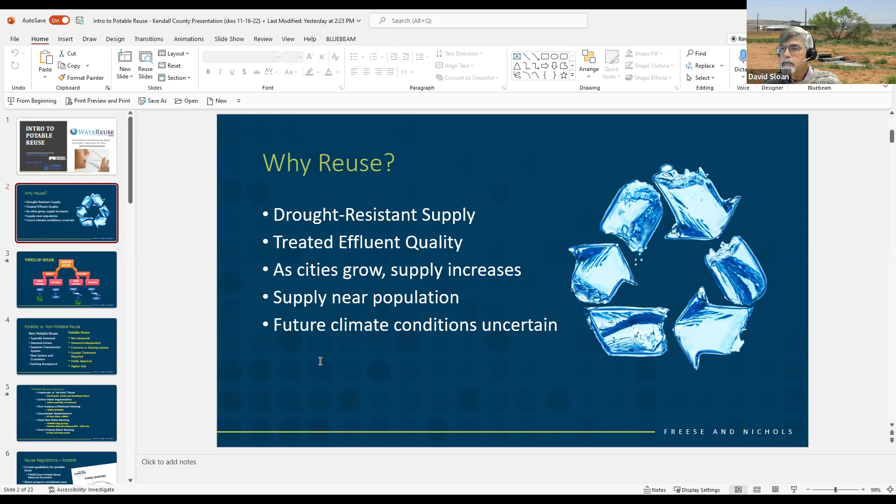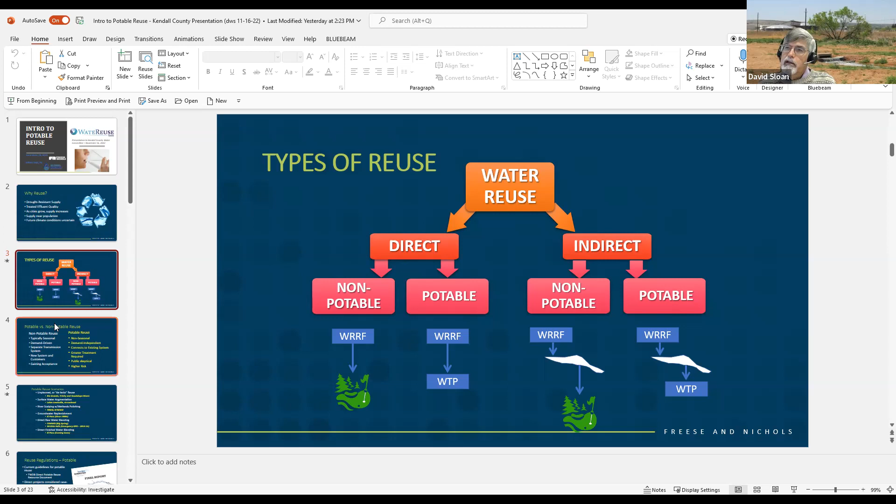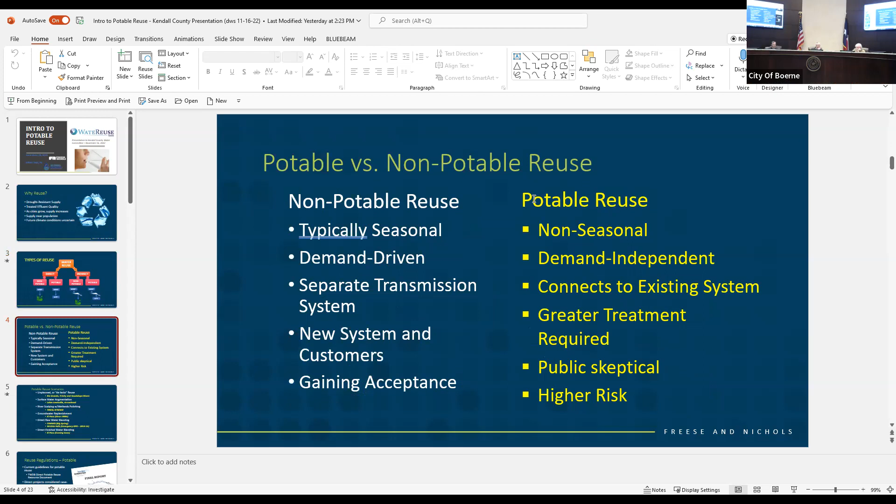When we look at some of the drivers that push us toward either non-potable reuse or potable reuse, these are just some of the key differences. With non-potable reuse, that's typically very seasonal, so you're going to have much higher irrigation demands in the summer, whereas potable reuse can be practiced year-round.

The non-potable reuse is strictly demand-driven. An irrigation customer is going to take what they need for their particular irrigation demands, whereas a potable reuse system, you're generally producing water as it becomes available, and you're blending that in with other sources.

You'll have a separate transmission system, your Purple Pipe system, for a non-potable system, whereas with a potable system, you're generally relying on your existing water distribution system. You've got specific customers for your non-potable system, as opposed to all the users being customers of a potable system.

It does require greater treatment, and to varying degrees, the public may be a little skeptical going in. But we've seen great acceptance on the non-potable side, and with education that can be achieved on the potable side as well.

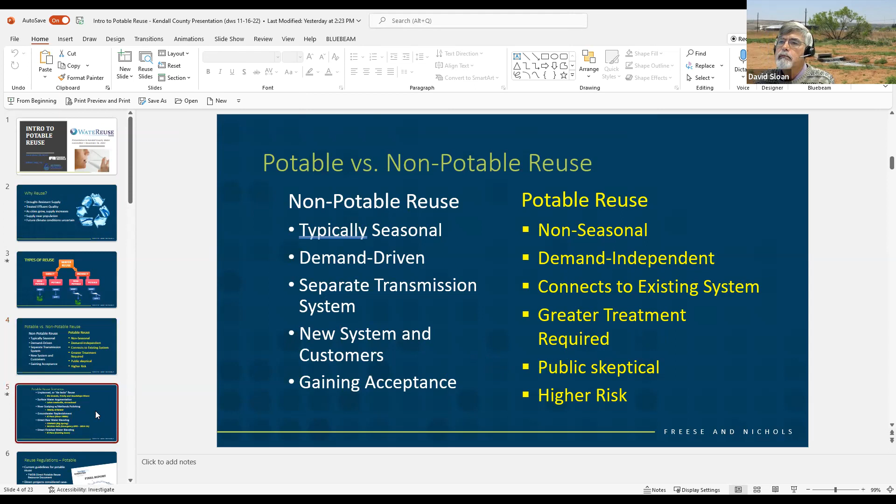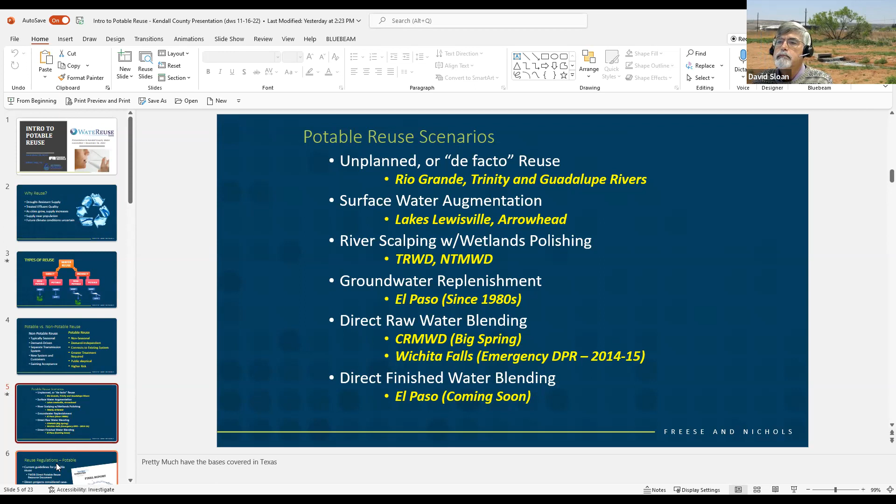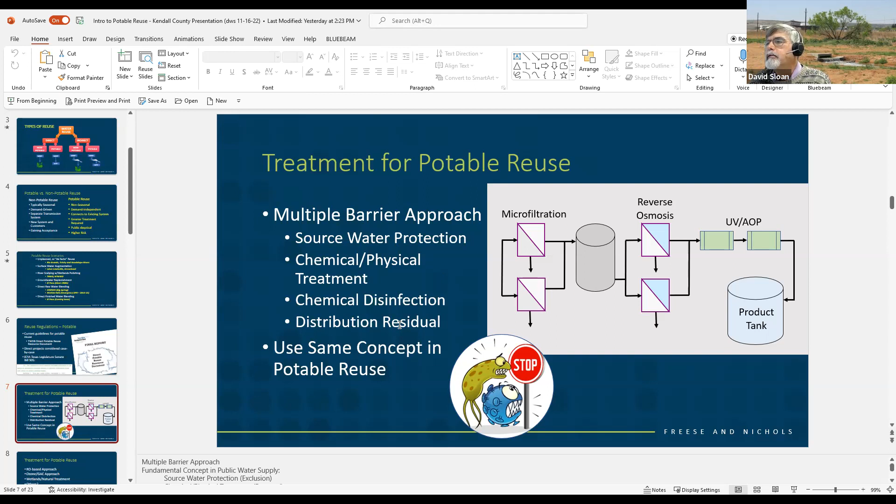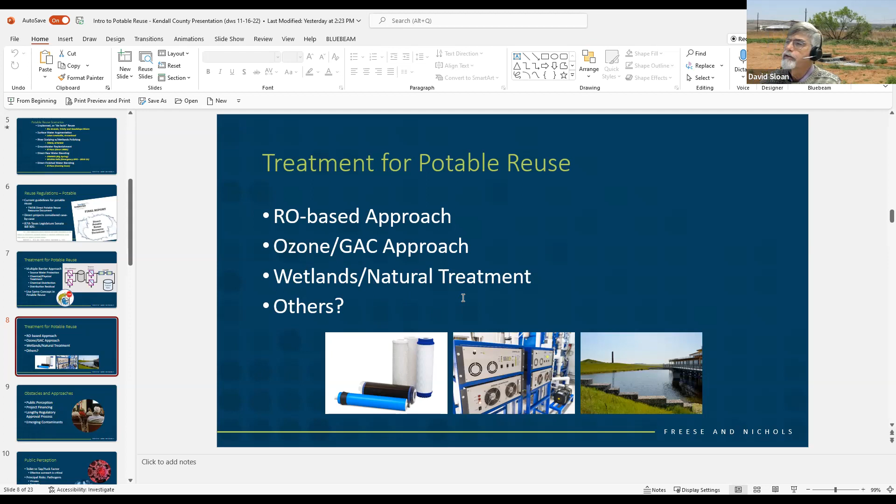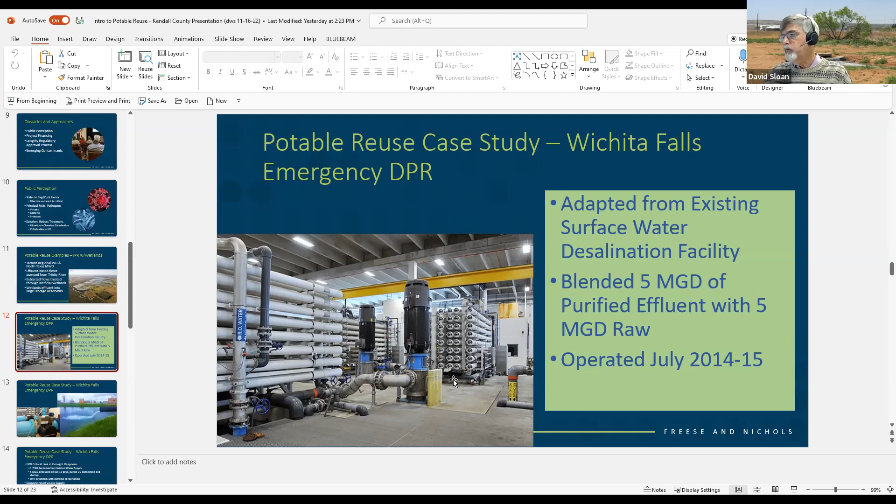This is the intermediate water coming from the RO facility going into an on-site lagoon at their plant, where it's blended with their other raw water and treated through their conventional plant. They did add a UV disinfection step, shown here in the picture on the left, for additional pathogen removal or inactivation.

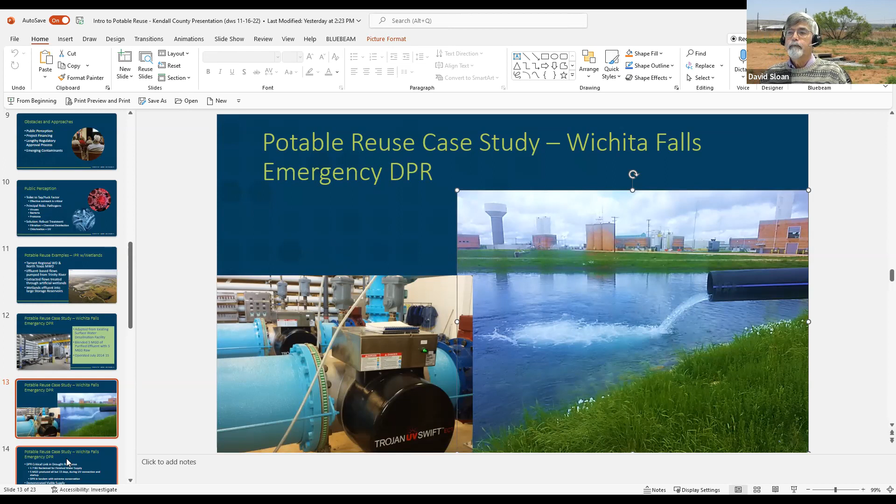Over that year, they treated 1.7 billion gallons that was added to their finished water supply. They did operate that plant at full capacity during that period for all but 13 days, and they did that in tandem with really extreme levels of conservation during that period. It did help get them through that drought.

The public acceptance of that was really quite amazing, to the extent that people were actually disappointed when they turned it off after the rains came and their freshwater reservoirs returned to full. People saw that they were actually getting better water with the operation of that facility than otherwise.

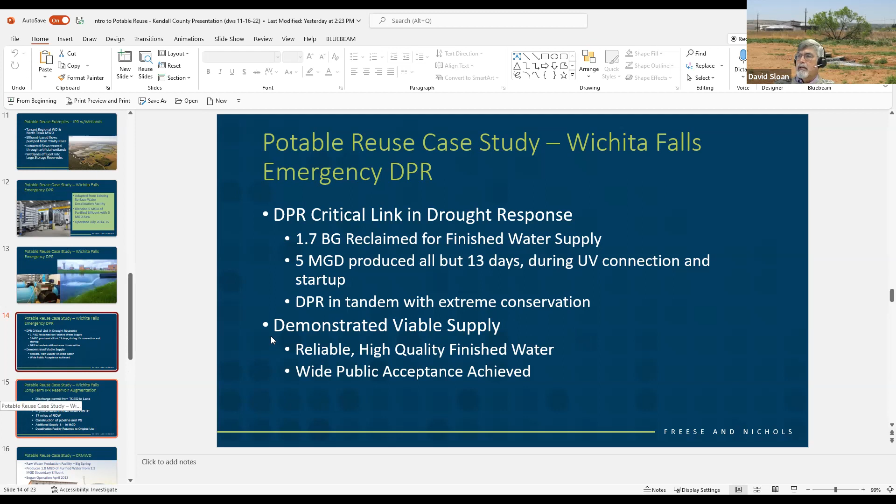As their plan was all along, they then went to what they saw as their permanent potable reuse, which was to pump their effluent to Lake Arrowhead, one of their freshwater reservoirs. So after the conclusion of their emergency direct potable reuse, they went forward with indirect potable reuse augmentation. And then that RO facility was able to be returned to its original intended use, to treat water from Lake Kemp, which is a brackish supply.

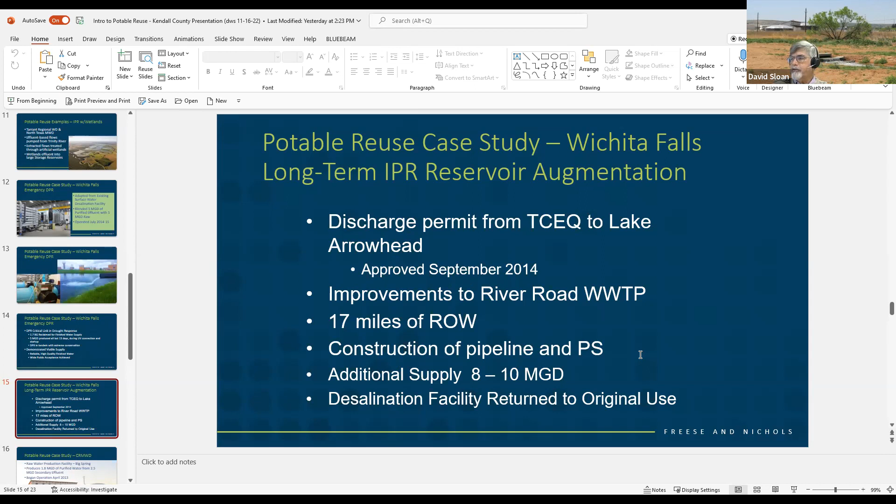The next facility I wanted to highlight was the Colorado River Municipal Water District. We were pleased to participate in this project. Their raw water production facility in Big Spring produces 1.8 million gallons per day of purified water, and that has been running since April of 2013.

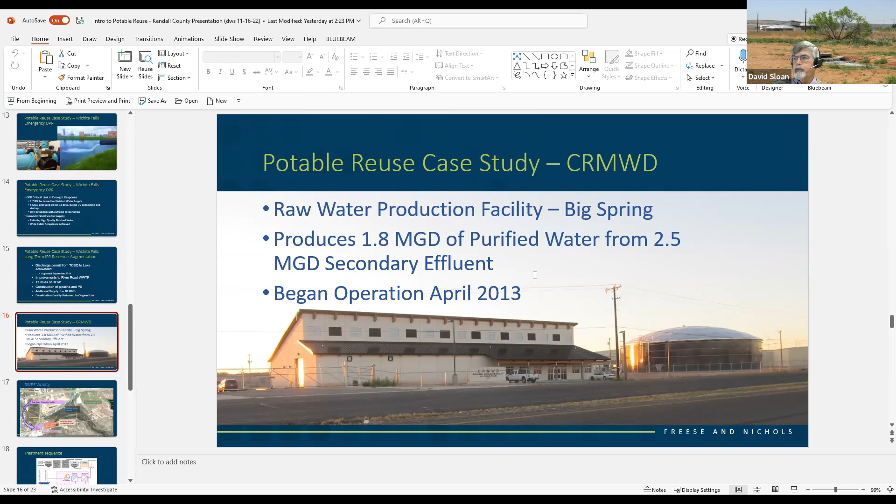You can see here in the red shaded area is Big Spring, the city's water reclamation plant. In purple, next door, is the raw water production facility constructed by the municipal water district. The product water from that facility is piped into a raw water pipeline going from Lake Spence to several of their customer cities.

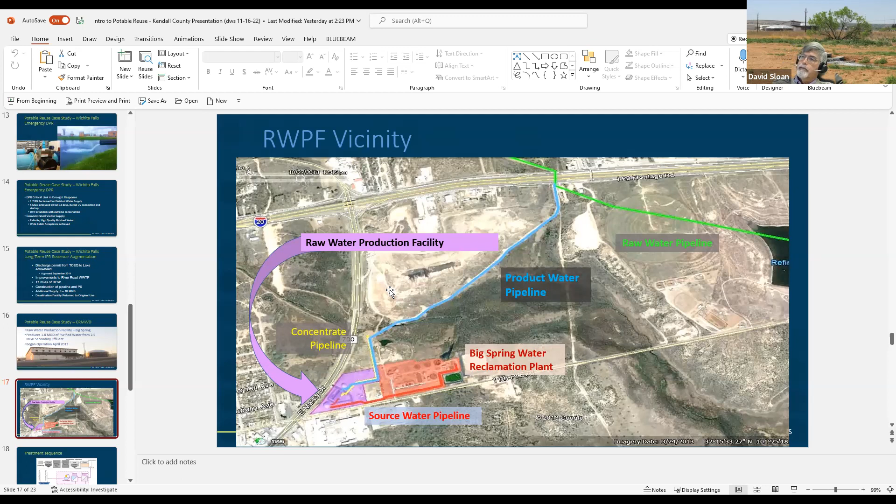The district provides raw water to a number of cities in the Permian Basin, and each of those cities has their own municipal surface water treatment plant. So this is kind of a generalized view because each of those water treatment plants are separate for the different cities, but it goes through the city's, in this case City of Big Spring's, normal wastewater treatment processes.

Almost all of that water then is transferred over to the raw water production facility, where it goes through membrane filtration, reverse osmosis, and advanced oxidation with UV and hydrogen peroxide. Then that's blended back into the raw water pipeline, blended with other water, and then sold to the various municipalities.

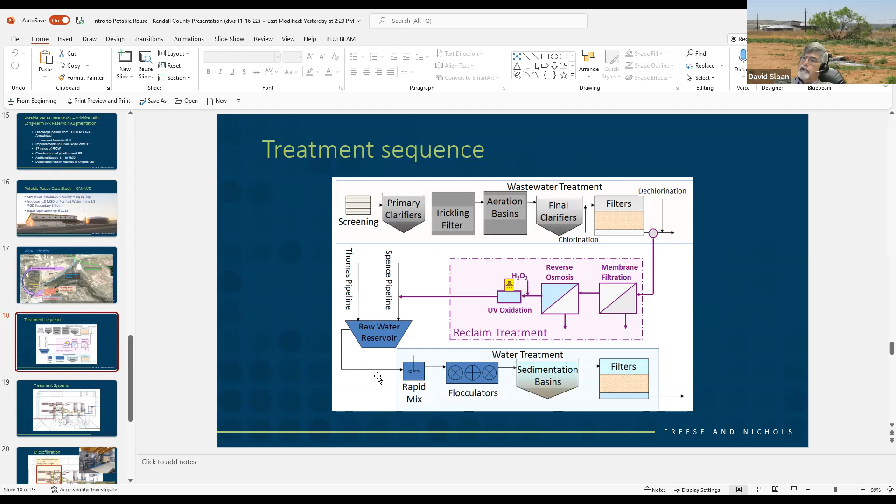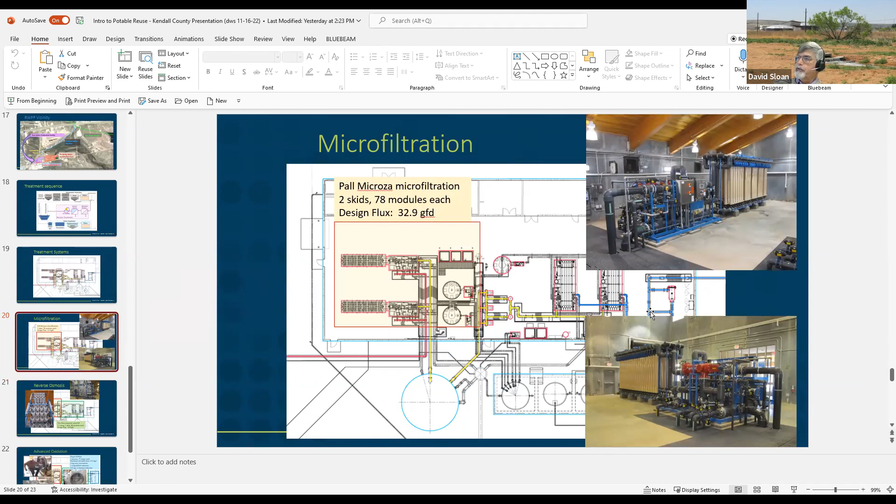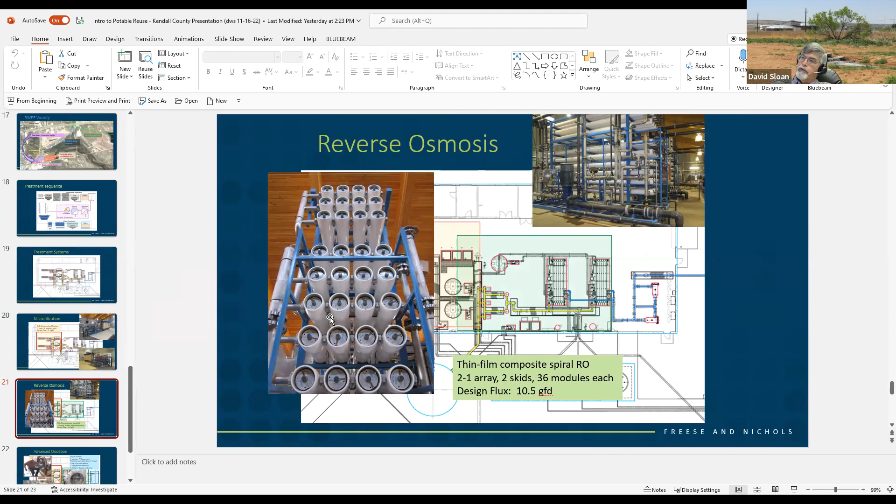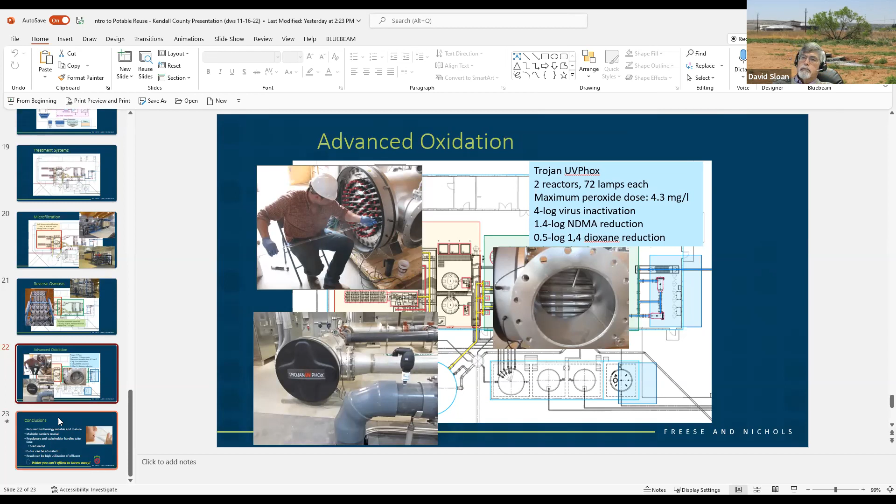So we have technology now that is very well proven, very capable of treating wastewater effluent to drinking water standards. There are a lot of hurdles to work through, but it's been done and it can be done going forward. I think we're starting to see a lot of interest across the state as we continue to have high growth and recurring droughts.

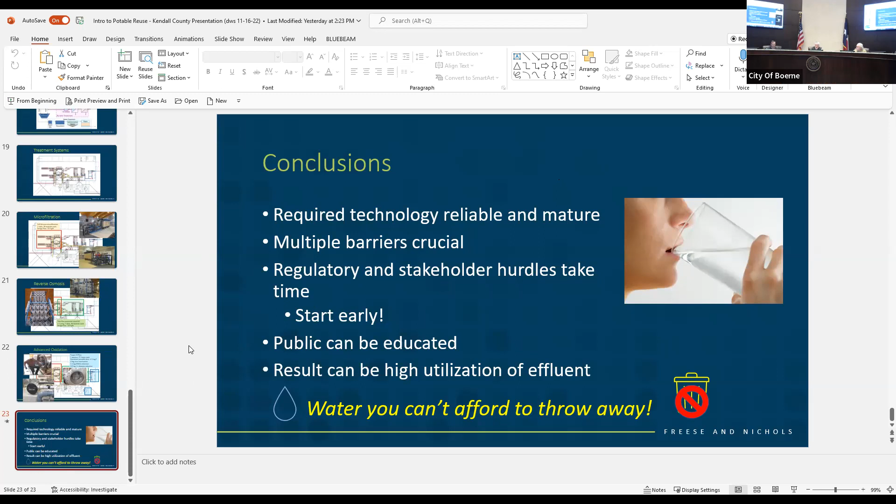I'd be happy to take questions. I know we don't want to linger too long before Gilbert gets to speak as well. I'm sure there are quite a few questions, and I'm not sure whether we're better off moving forward to getting Mr. Trejo in as well, and then you guys jointly handle things. That might be a good way to do it - you guys can tag team together, and there's a lot of information he's going to provide that corroborates what you've already provided, David. So if you don't mind, and if you've got time to hang on with us, I'd appreciate it. Gilbert can take us into the next phase of the discussion, and then we can have some time for questions, if that's all right. That's great. Great, thank you.

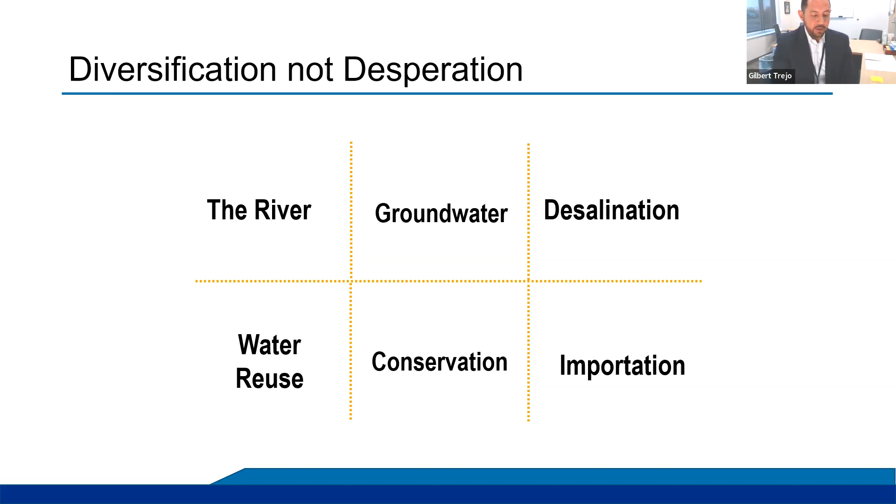Our story in El Paso is one of evolution through water reuse. These, as David alluded, are not simple projects to execute for your community. The ick factor, the yuck factor, is very real. We learned from a lot of case studies and examples out in California when they wanted to start doing these types of projects, the pushback that you will get from a community when it comes to this.

But in El Paso, we have a story to tell in terms of why we're doing advanced water purification in the form that we're planning to.

In El Paso, we're proposing what I call the maximum level of water recycling, where we take treated wastewater from our wastewater plants that will immediately feed an advanced water purification facility. Unlike other examples David noted, where they may use this highly treated water to augment raw water in a reservoir, augment water in a river, or store it in a groundwater basin the way we do in El Paso...

We plan to take this highly treated water and blend it directly with our drinking water distribution system, in our tanks, and it'll go straight to our customers. So this is direct-to-distribution advanced water purification. It makes sense to El Paso.

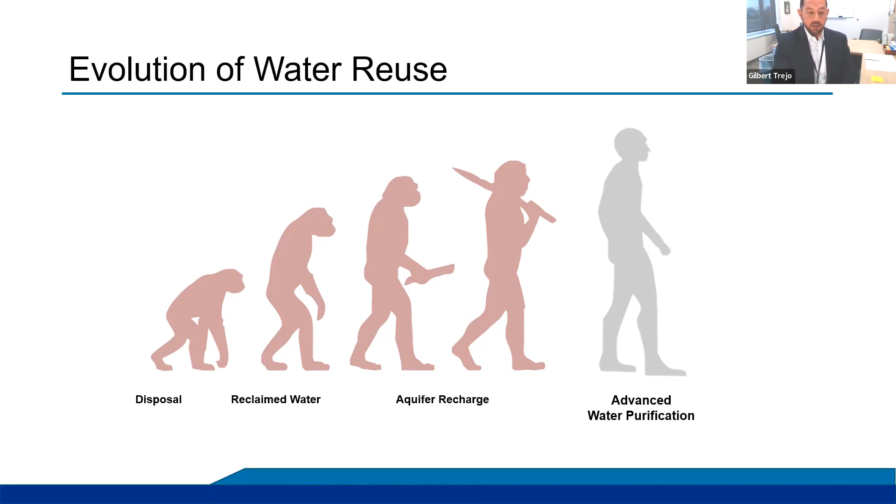As I mentioned, in El Paso we've gone the full gamut of water recycling: the fate of cleaned wastewater from just plain disposal, as a lot of communities do right now, disposal into a river, a creek, or a stream. But we also do reclaimed water, as I mentioned, and aquifer recharge, as David mentioned and I mentioned earlier. And then, of course, the next step is advanced water purification.

Complementing what David mentioned, the advanced water purification process in El Paso made sense for El Paso, and this is part of the regulatory framework that Texas allows us to do. There is not one blueprint that makes sense for everybody, and I believe this is a very good way to handle these types of projects.

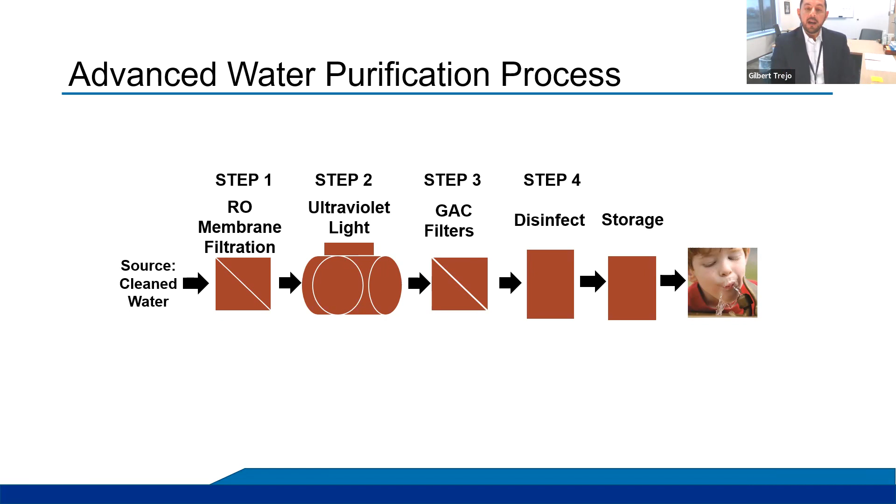There are multiple barriers we use to achieve the level of treatment and reliability needed for high quality, reliable water that our customers deserve. These are the constituents we focus on, including micro constituents like pharmaceuticals and chemical contaminants from industry or non-point sources. Our treatment process has three different processes that fully remove micro constituents, with reverse osmosis being very effective, removing 99% to nearly 100% of these constituents.

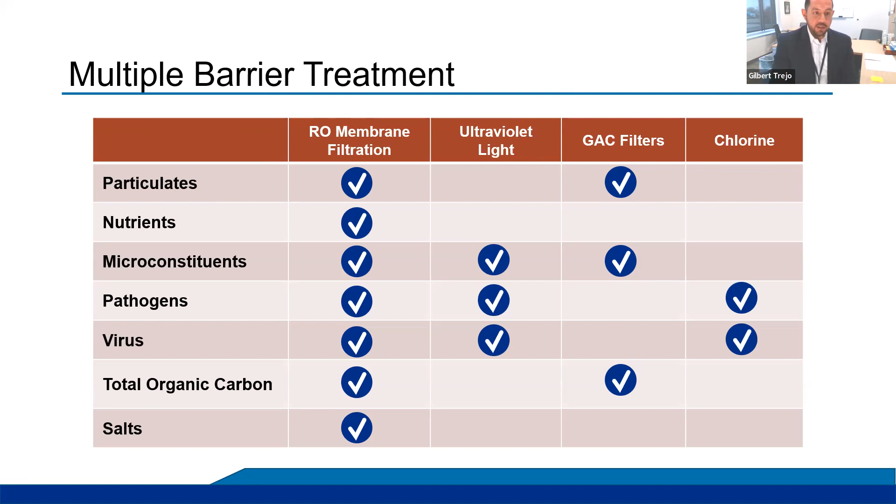The processes that follow are what we consider polishing treatment. When we piloted the facility, we saw that these other treatment processes really had nothing left for them to remove or destroy. But nonetheless, this is the level of treatment we've chosen for this project.

I mentioned the pilot facility. This is very typical for advanced water purification projects. The pilot facility serves as proof of concept for the utility and for our operators to familiarize themselves with these treatment processes, but it's also an excellent public education tool, allowing the public to tour the facility and see what we're doing and how.

What we realized was once folks toured these facilities, they became much more comfortable with what we were doing. The ick factor goes away. These pilot tours went a long way toward eliminating the thought that there was a direct connection from the toilet to the tap, which we found through a lot of surveys. Many folks aren't savvy about where water comes from, so when they hear phrases like 'toilet to tap,' some were worried - but it's not the case at all.

They get to see the water quality we're starting with, which is already very clean, clear water that's safe to discharge to the environment and already meets regulations tied to the Clean Water Act set by the EPA. It's not turbid or dirty at all - it's already clean water that's safe for the environment, and that water then gets treated to a very high standard with these advanced treatment processes.

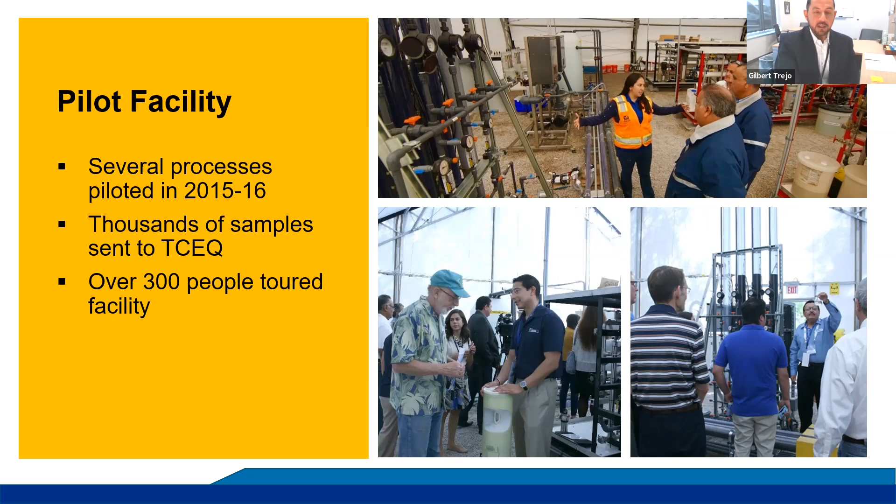Talking more about public acceptance - we wanted to go the extra mile to ensure the utility is held accountable and held in check. An independent panel of experts was assembled thanks to the National Water Research Institute. They served as a third-party research entity overseeing our data, our concepts, and the execution of the project, so that we could then have their support.

At the end, what we asked from this panel was a general letter of support saying that El Paso Water was doing things correctly, safely, and to an over-and-above level of excellence. The panel was comprised of water quality experts, water treatment experts, chemistry experts, microbiological experts, industrial treatment experts, and public outreach experts - world-renowned and experienced in these types of projects. We assembled them, and they did provide a letter of support for our project.

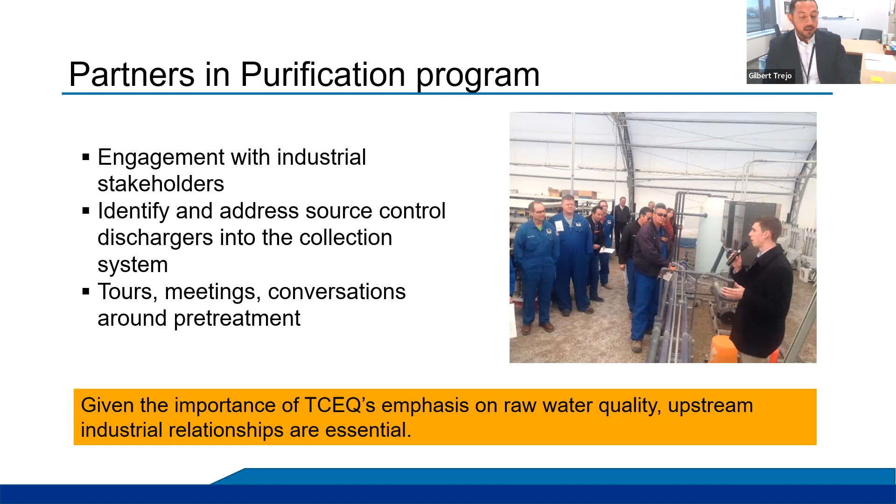Improving water quality is another step we took in addition to the Partners in Purification program. We made more stringent the water quality requirements that industry can discharge into our wastewater collection system. We changed the local limit of the maximum amount of biochemical oxygen demand.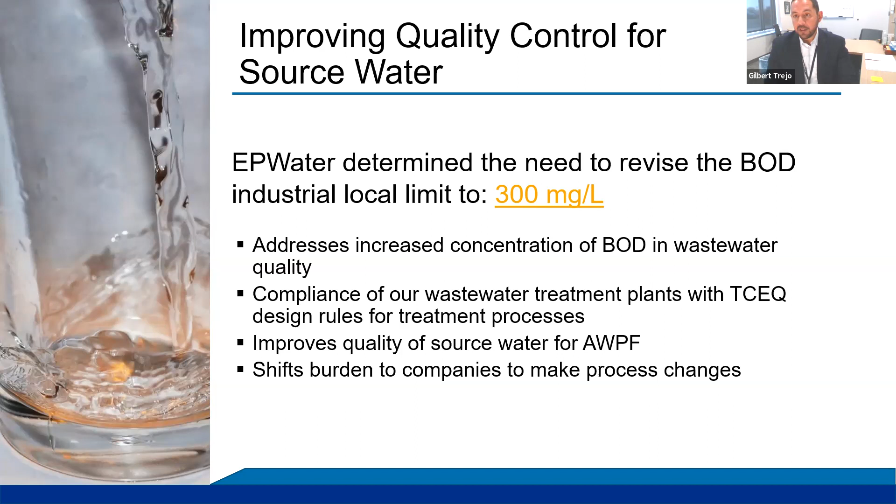This was a necessary step we had to take. Some industries had to take additional measures to further clean their wastewater before discharging it into our collection system. But through the Partners in Purification program, this was not a surprise to them—we worked with them to give them time to install the necessary treatment to achieve this new goal. This was a necessary step to assure the highest quality wastewater that would then be cleaned and fed into our advanced water purification facility.

Operator training is another thing that is very important for these types of projects. Advanced treatment processes—a lot of facilities maybe don't have them yet anywhere in their treatment portfolio. So training operators and maximizing that training so they get both a water and a wastewater operator license is something we're striving for in El Paso. We're working with the state to help us get these dual licenses because it's not simple—they require a lot of experience at both wastewater and water treatment facilities. Training for operators is something that should be considered when these projects are being developed.

In the end, in El Paso, we have 84% in favor of our advanced water purification facility—this is the direct-to-distribution approach. It took a lot of effort, a lot of education, took a lot of time.

Our water reuse story started in the 1960s, when we had our very first drop of treated wastewater hit the first golf course. That grew and evolved over time, and we were able to leverage all of this information to our customers through public education in schools. We now have a generation in El Paso that has grown up being very water conscious, which I believe has helped achieve such a high number of approval for our project.

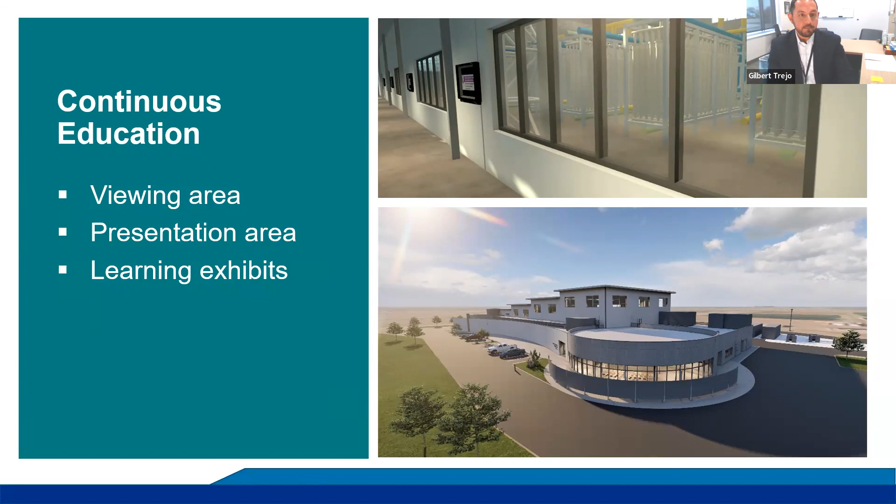These projects are expensive. There's no getting around it. The cost of this water is up to 3 to 4 times the cost of our current water that we're producing.

For these reasons, we have had the opportunity and been fortunate to receive federal funding from the Bureau of Reclamation for these types of projects. The good news is there's a lot of money available right now, granted and authorized to the Bureau of Reclamation to award to communities doing water reclamation projects. We were fortunate enough to receive $20 million here recently for this facility.

As I mentioned, this facility has not been constructed. However, if you look at the timeline, we are at the tail end of design. We are repiloting the reverse osmosis membranes one more time. Since 2015 to now, technology improves quickly, and there are new membranes available. We are piloting those new reverse osmosis membranes so we can get them approved by TCEQ, which will ultimately improve the operation of the facility. We're doing that into 2023. We're hopeful that by late next year to early 2024, this facility will go into construction, and we'll be producing water to our customers by 2026.

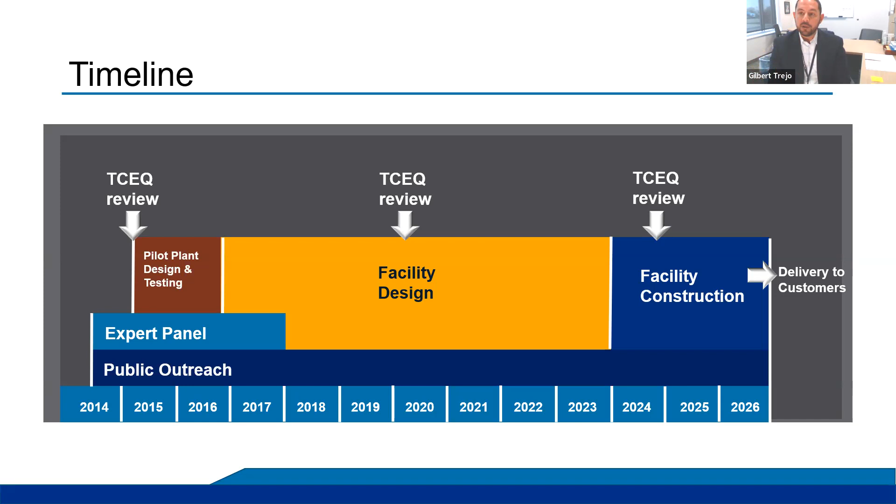That's the end of my presentation, and jointly with David, we'll be happy to answer any and all of your questions.

Thank you, Gilbert, and thank you both of you gentlemen. A lot of information. I'm sure there are quite a few questions. So let's start. Tommy, anything on your end?

We'll just work through it. Yeah, I had a couple of questions. On the groundwater replenishment, is that via recharge or is that via a class 5 injection well? Tell me a little bit about that in the treatment criteria. I'm assuming you're taking it back to primary drinking water standards before you put it back in the ground, but I don't want to live on that assumption.

So you are correct. We are taking and treating the wastewater to a full drinking water quality. At the inception of the project, we did use injection wells, and by mechanical and pressure means, we would inject the water into the aquifer. We did that for about 5 years before we completed some geological studies that allowed us to do some infiltration ponds. We're fortunate in El Paso where the geology is present, so we can simply dig to a certain depth to create a pond, and then discharge our water into the pond, and it will infiltrate directly into our aquifer and recharge it. So we started with mechanical injection means, but we no longer do that. We now use infiltration ponds for that.

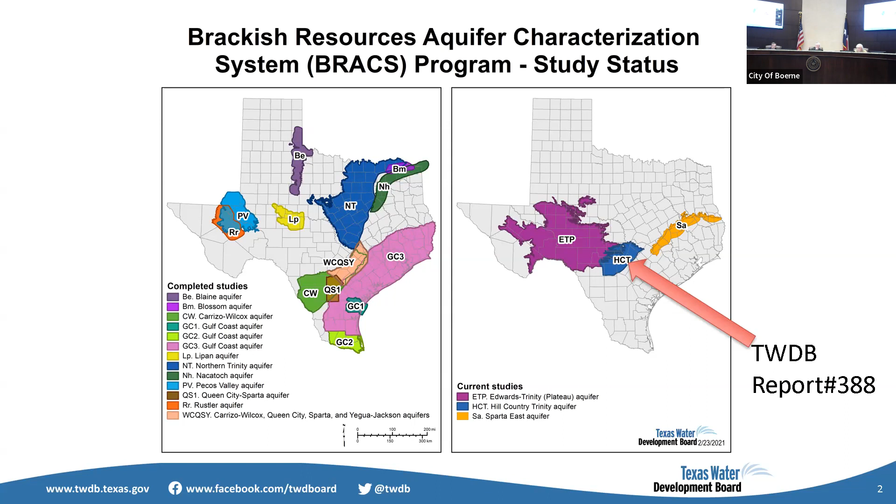We focus on data, which is a very big part of our studies. We look at the stratigraphy, look at the aquifers that are part of the study. We map the salinity, we do volume calculations as part of the process, which is totally separate from the MAG volumes you're used to seeing in water planning. So we need to be clear these are for comparisons and evaluation of potential brackish projects, and not part of your ongoing DFC determinations, et cetera.

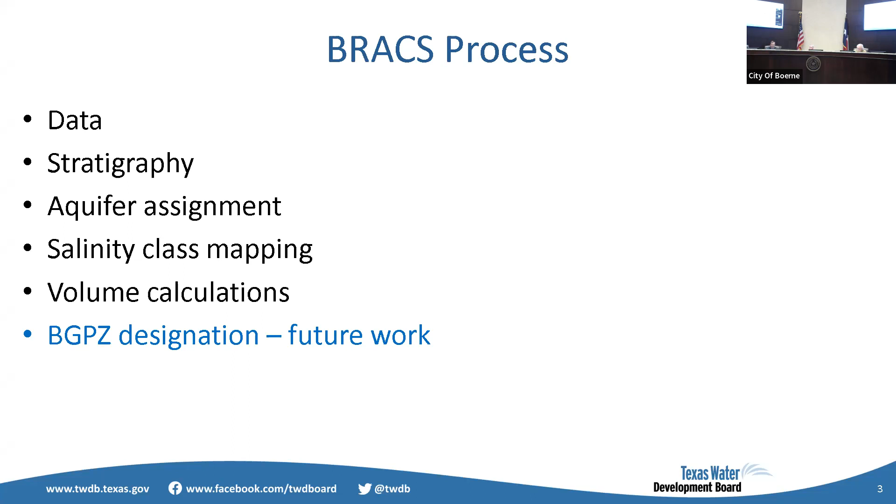And we'll do brackish groundwater production zone designations moving forward. Those have yet to be done for the Hill Country and some of the other project areas.

There's a lot of data. We pulled in over 24,000 well bores that penetrate the Trinity in the study area, and somewhere buried in there is Kendall County. You guys have lots of holes, and these are just the ones that we know about. As I'm sure you're all aware, not all wells or holes or borings done into the Trinity have been documented, although I think we're doing a better job these days than we have in the past.

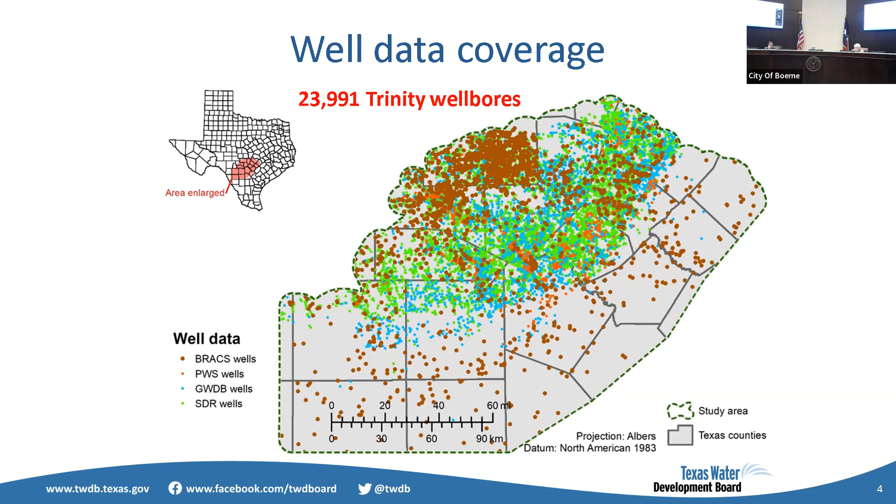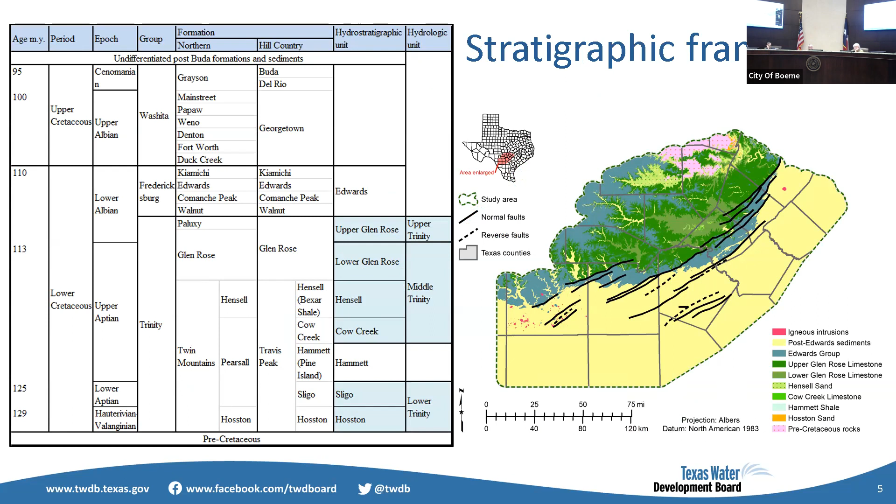The stratigraphic framework we're talking about is the Cretaceous, as was mentioned earlier. Kendall sits right in the middle of the outcrop of the upper and lower Glen Rose, which is near the upper part of the Trinity. Structurally, there are a lot of historical geological events that have occurred that created the Hill Country as we know and love it to be. Some of it's faulting and folding, some of it's depositional, and it's created a unique environment.

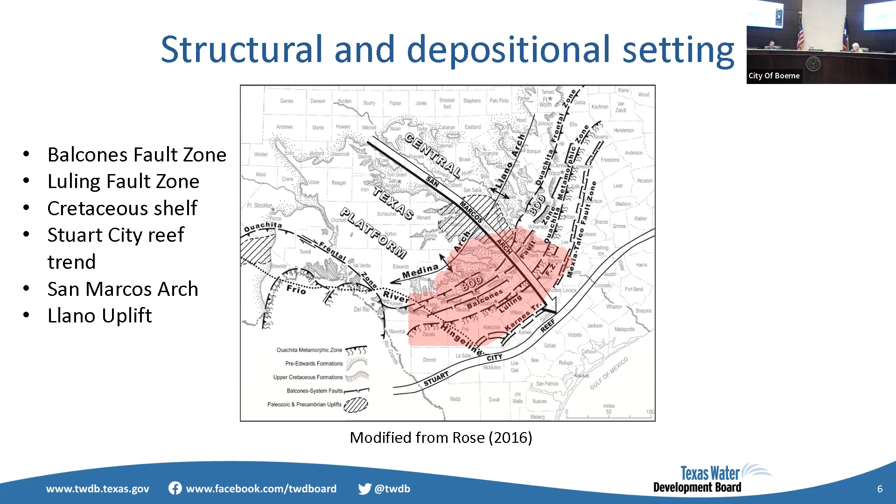One of the things we did in this study, using a total of about 1,300 wells, was stratigraphic analysis utilizing geophysical well logs. These measure the properties of the rock. They're wireline tools lowered into the well bore with different types of measuring devices. They'll measure the natural gamma ray of the rock or its electrical properties, creating wiggly line traces that give great insight into the actual depositional character of the rock and the fluids the rocks may contain.

With these logs, we're able to delineate the different portions of the Trinity that we studied: the upper Glen Rose, lower Glen Rose. We broke out the Hensell sandstone, the Cow Creek limestone, Hammett shale, and then the lower Trinity units, the Sligo limestone and Hosston sandstone, and they all sit on top of a Paleozoic basement that's many hundreds of millions of years old.

This map gives you a sense of the topography. We call it an elevation map, but it's measured in mean sea level. The base of the Cretaceous is the bottom where all of the Cretaceous sediments were deposited. As the sea level rose back in those days, it deposited limestone, sand, etc., onto a basement of the old Paleozoic rocks. You can see that where Kendall sits is probably a pretty flat basement situation at the time of Cretaceous deposition.

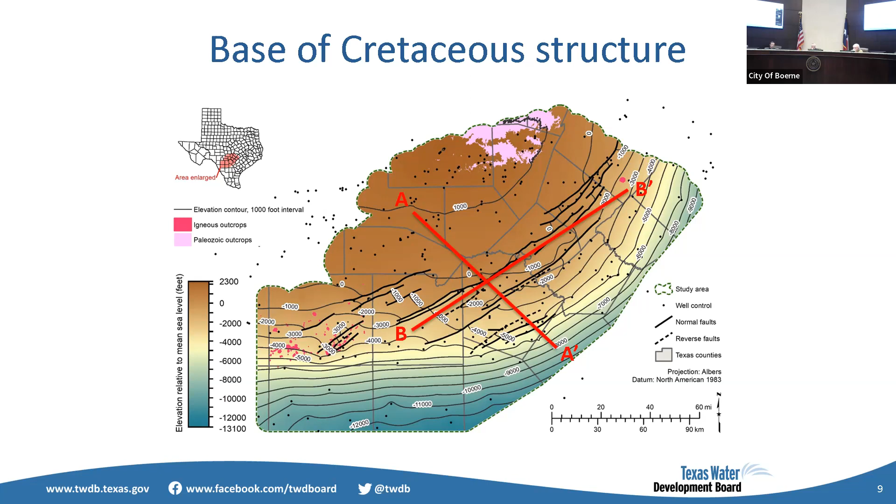And a cross section—this is the A-prime cross section, the red line across the structure map.

Kendall County is outlined there, and the different color bands you see are the Trinity group, with the yellow underlying rock being the Paleozoics. The Paleozoics are generally very dense, metamorphic, some igneous rocks that have low propensity for providing aquifer storage or any type of water production.

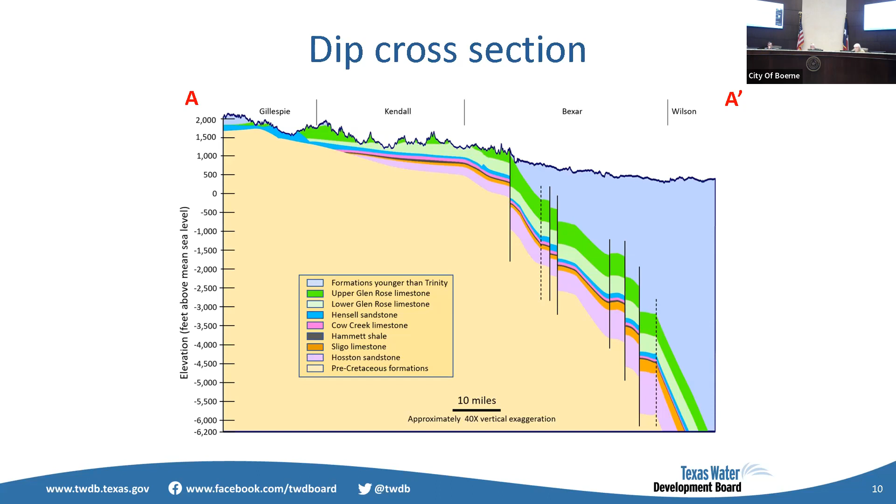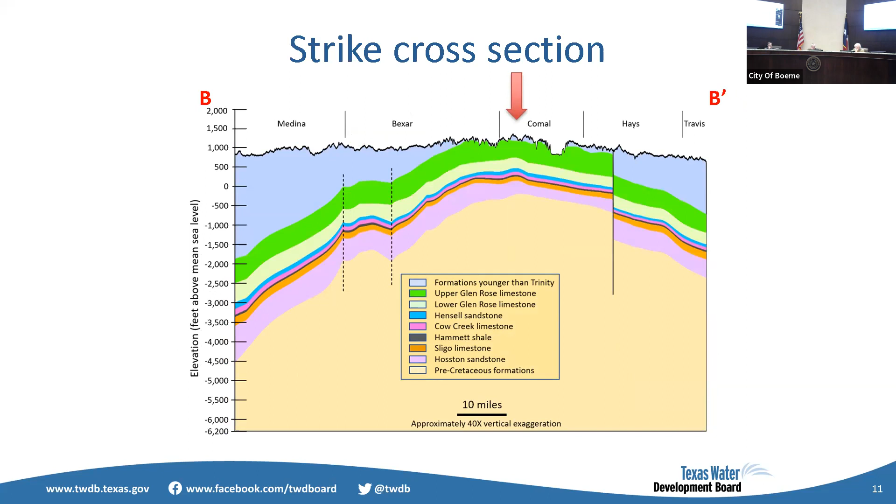So the Cretaceous, that thin strip on top, is really where the groundwater exists within the study area for Kendall County and throughout the area. This crosses from Medina County all the way up to Travis County, showing the arch they call the San Marcos Arch.

We've heard a lot about potable reuse, and the fact that El Paso is famous for being an early pioneer of desalinization of groundwater. There are many projects throughout Texas.

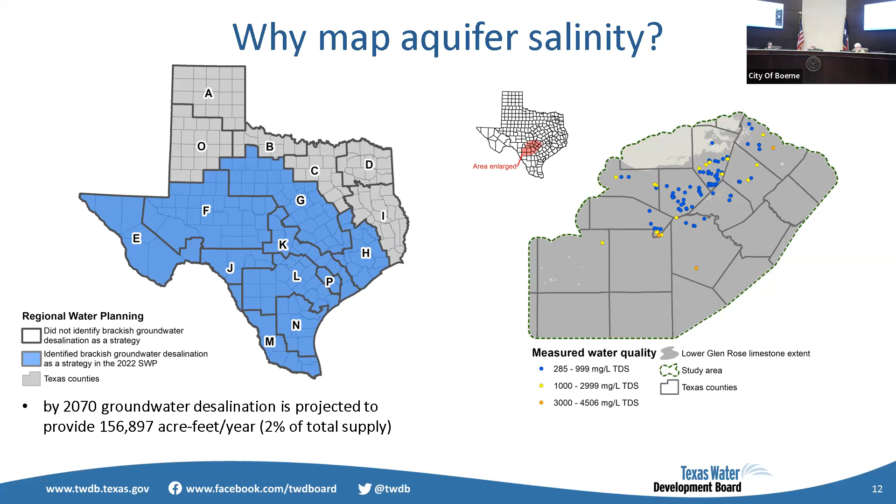We have water chemistry, we reviewed some of that. Let me jump ahead a little because now, for the study, we first rely upon measured water quality. This is water samples that come directly out of groundwater wells.

The Texas Water Development Board has a program where they go out and measure and sample water wells throughout the state. But there are many other water samples reported and recorded in the groundwater database, historical groundwater systems, as well as the TCEQ in their public water supply system, which has many groundwater systems. On occasion, we get private data from different companies provided to us that we can include in our studies.

The map on the right shows where these water samples existed, blue being fresh, yellow being saline.

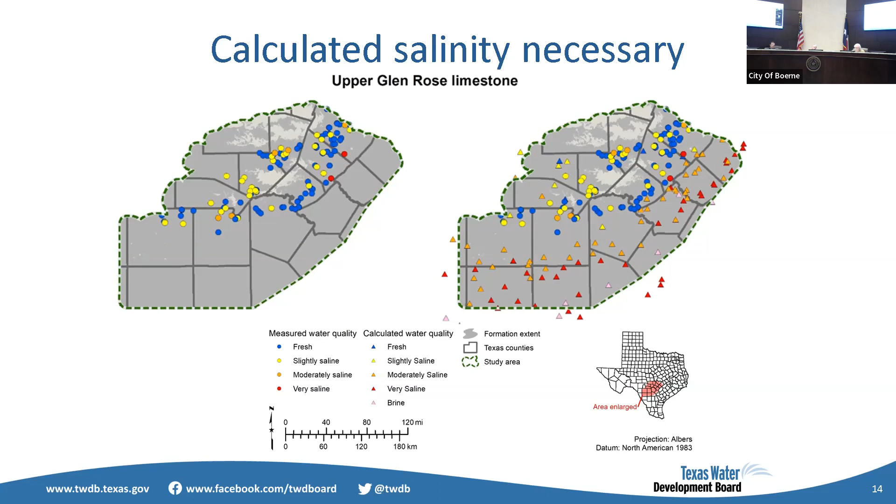The challenge for our study was we also needed to analyze water quality to the south of the study area, where no water samples have been collected because the wells are too deep, generally oil wells drilled deeper than the Trinity. So we use geophysical well logs to calculate water salinity. As you can see on the map on the right, it added a lot of points, generally highly saline, moderately saline type wells.

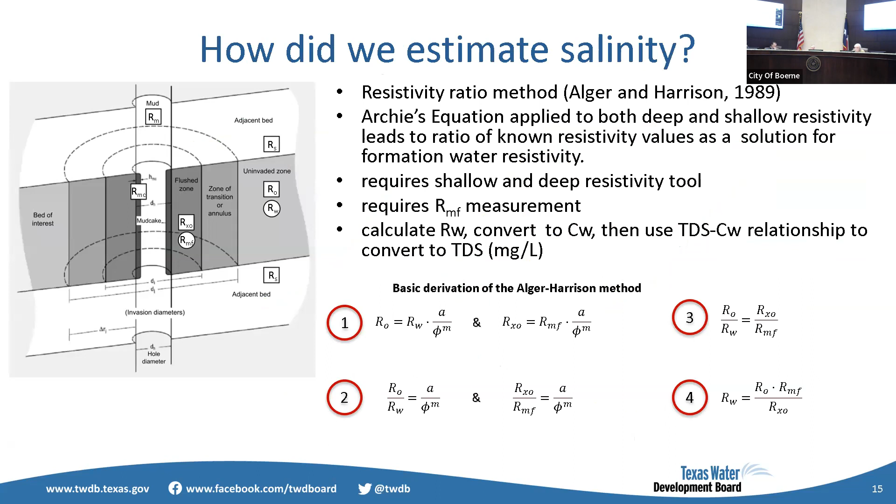I don't think I need to get into the science of how we do that, but it's available in the report. It's not a mystery, it's well documented. I think we've utilized existing science, and between us and some work done at the Railroad Commission over the last 20 or 30 years, we've gotten pretty good at it.

For the maps ahead, the color code will basically be fresh, which is to drinking water standards of less than 1,000 TDS. If you're just getting water from the Edwards, you'll see it at 300 or less, but others will not be so lucky. Slightly saline, 1,000 to 3,000, is the bright yellow — that's good for irrigation, industrial purposes, etc.

Moderately saline is 3,000 to 10,000 — you're getting at the upper limit of really usable water. The 10,000 TDS mark is the base of usable quality water, which is defined by the Railroad Commission for injection wells and other things. So greater than 10,000 TDS is very saline — we map that — and below that is brine, basically seawater level concentrations.

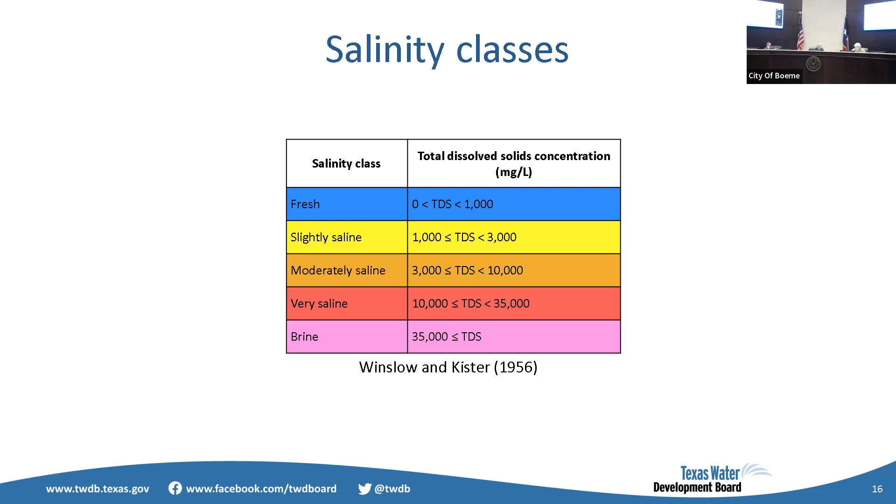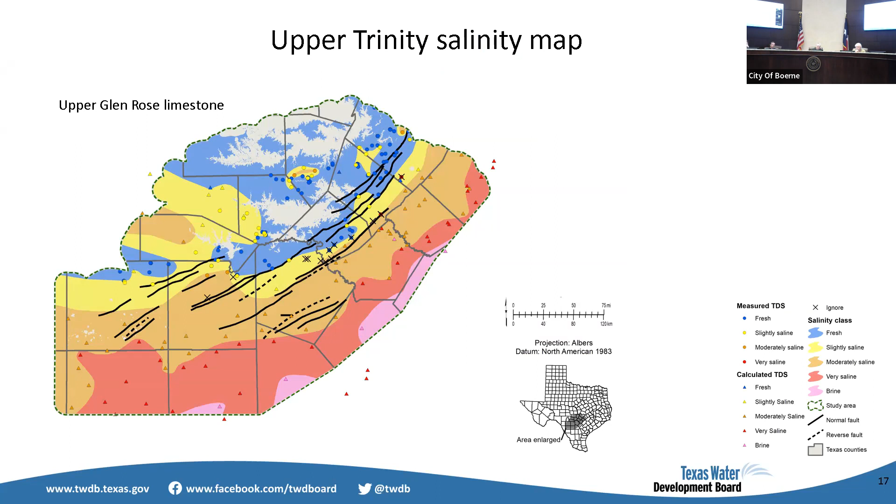We have a series of maps for the different zones, the Upper Trinity. If you look at Kendall County, the Upper Trinity, which is the Upper Glen Rose limestone, is pretty much fresh, though on the western edge you do get a little bit of slightly saline water samples.

These maps are a little smaller, but we see the Lower Glen Rose — this is all Middle Trinity units. Lower Glen Rose is predominantly fresh. The Hensell, you do find in Kendall slightly saline, and the Cow Creek...

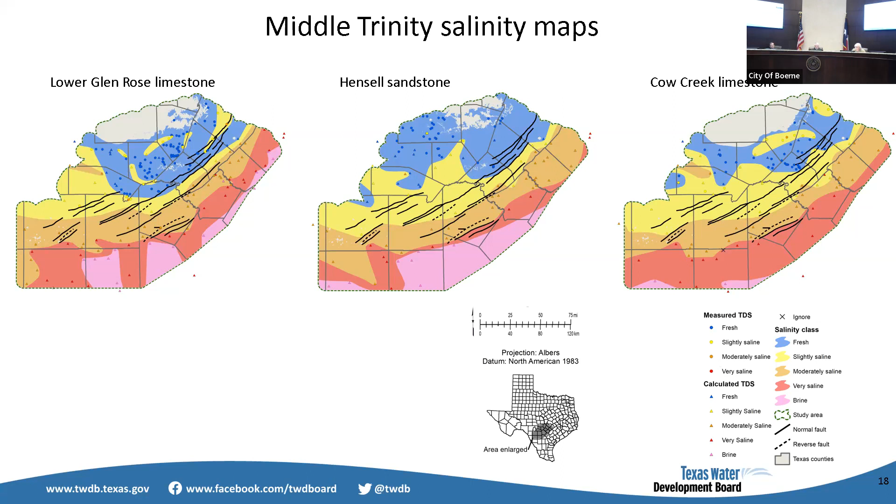We'll see a mixture of fresh and slightly saline water. Then we move into the lower Trinity units, the Sligo and the Hosston. Again, focusing on Kendall County, we have predominantly slightly saline water, and again predominantly slightly saline water for the Hosston sandstone.

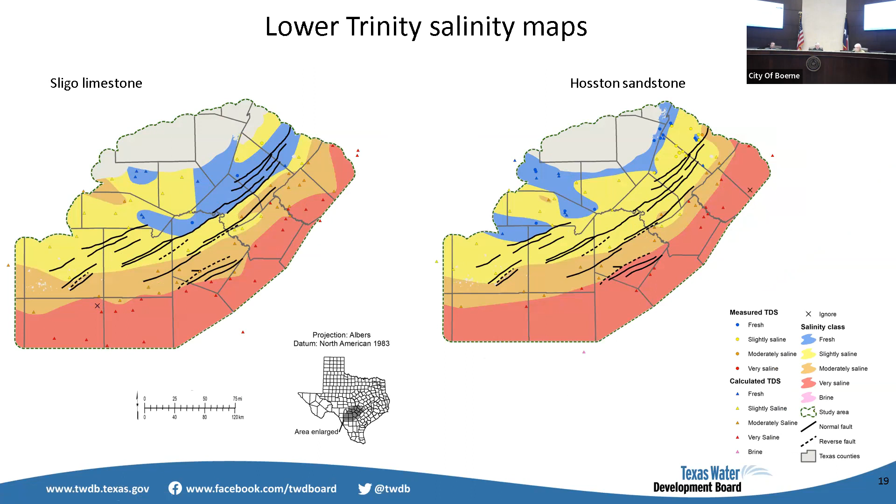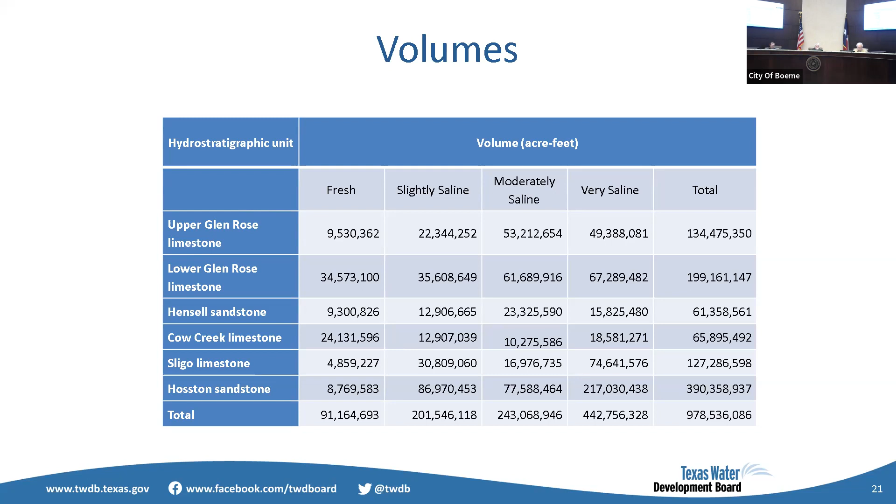We won't get into aquifer properties or volumes in detail — these are general volumes found in our study, and there's a lot of water in the Trinity. Now, these volumes are in-place volumes; they're not water that can be produced, because you can never squeeze an aquifer like a sponge. So they're only for evaluation purposes, not for saying 'I'm going to get 90 billion gallons of water.' In the Cow Creek Groundwater Conservation District, I pulled this out of the report.

So I tabulated this for all the GCDs as well as on a county basis. You can look at these numbers. But roughly speaking, we see about 3.5 million acre-feet of total aquifer storage for fresh water.

And slightly saline, you have about 6 million acre-feet of saline water, which puts you in pretty good position. But again, that water is going to be deeper, and some of the Hosston units you'd expect to have a little less porosity and permeability. So there may be some issues in terms of producibility of the aquifer, and all of those things will have to be studied on a site-specific basis.

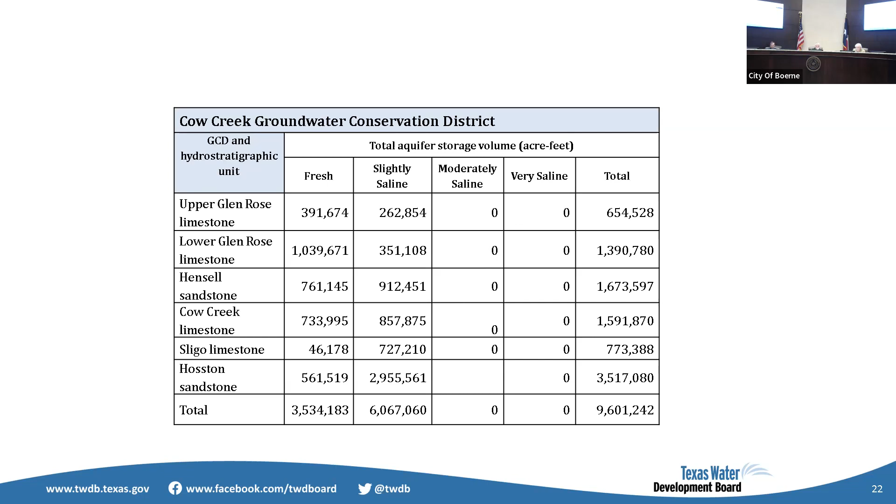But if you'll notice from the chart, almost 3 million, so about half of the slightly saline water exists in the deeper Hosston sandstone units. And the sand thickness of the Hosston, which I thought might be of interest—

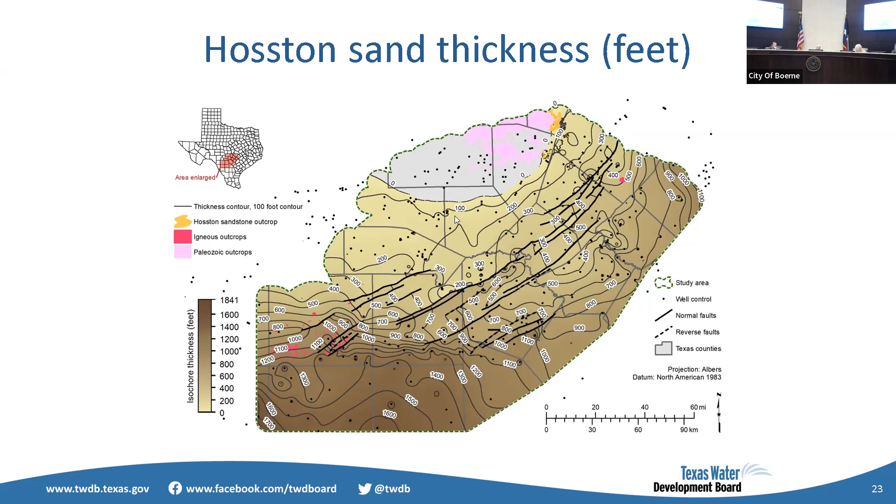So again, I pulled this from the report, showing where it terminates below ground. It'll get up to about 300 feet thick beneath Kendall County, so there's a good thick Hosston wedge that sits in Kendall County, but it does pinch out to the north and thin.

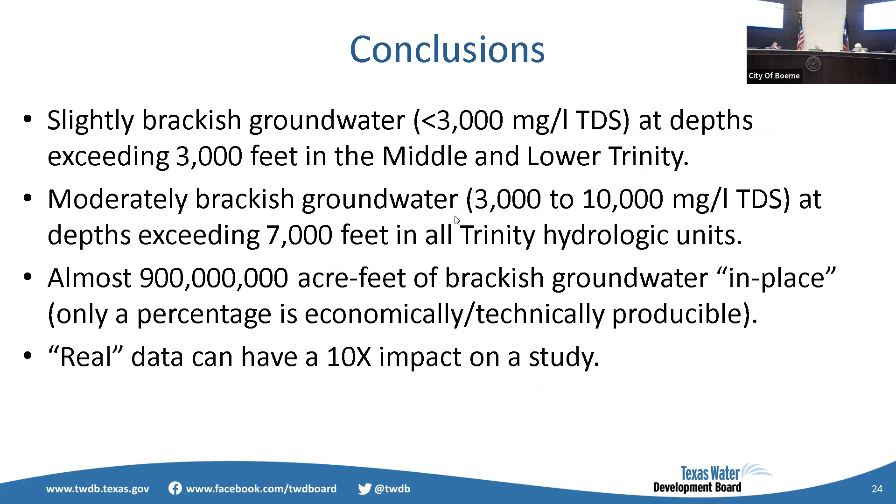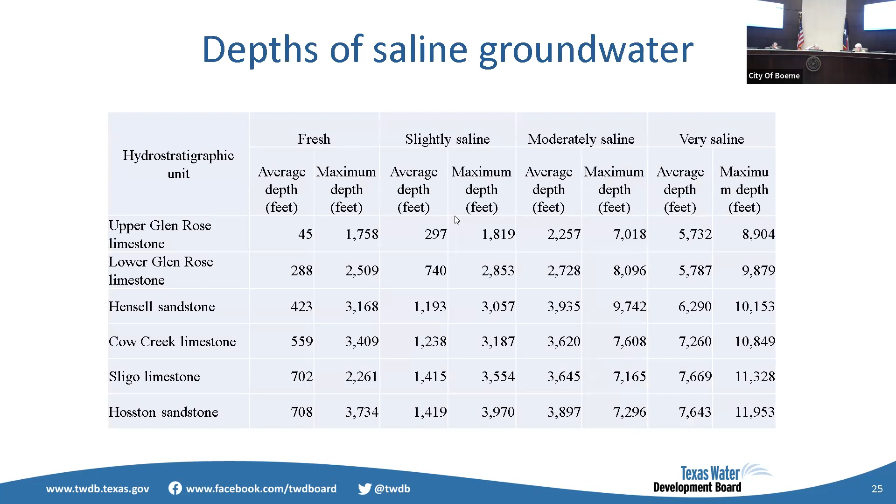So these were the general conclusions from the study—probably too much, and these are general depths too. I didn't have time to pull the numbers just for Kendall County, but we can definitely take a look at that if possible.

You can reach me at the Texas Water Development Board—we're always there for you. And the data is shared freely; all of it's public domain. Anything in this study is available to consultants, to private individuals, if they'd like to use GIS systems. And I'm open to questions now or anytime in the future.